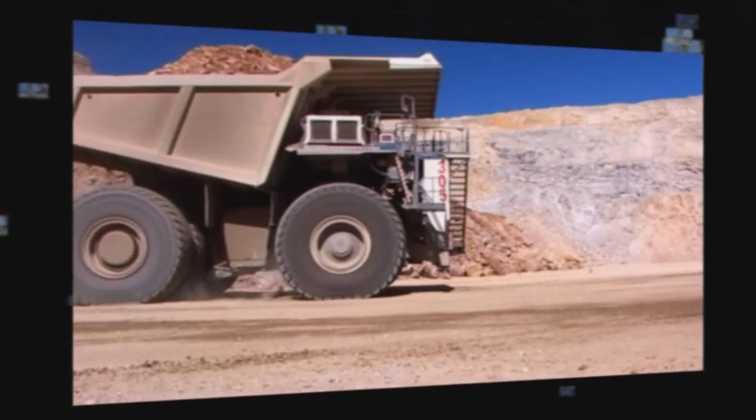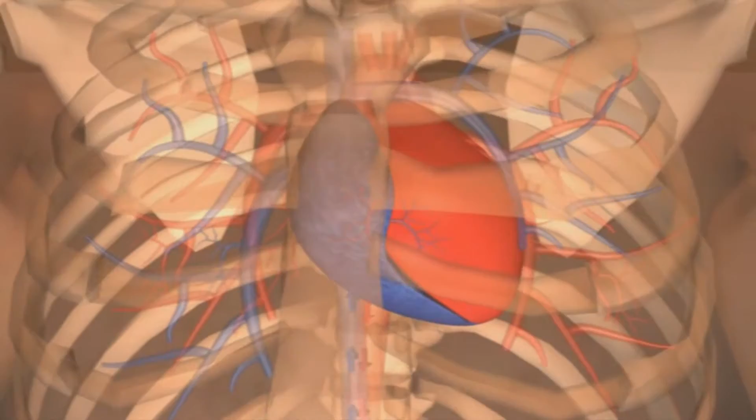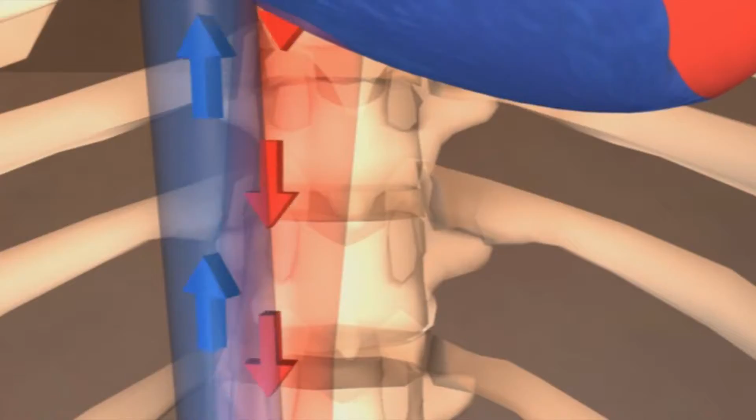It should come as no surprise that the key elements in today's powerful hydraulic systems bear so much similarity to the remarkable technology within the human body. The hydraulic pump is much like the heart. The tubes, flexible hose, and couplings are like the blood vessels of the circulatory system.

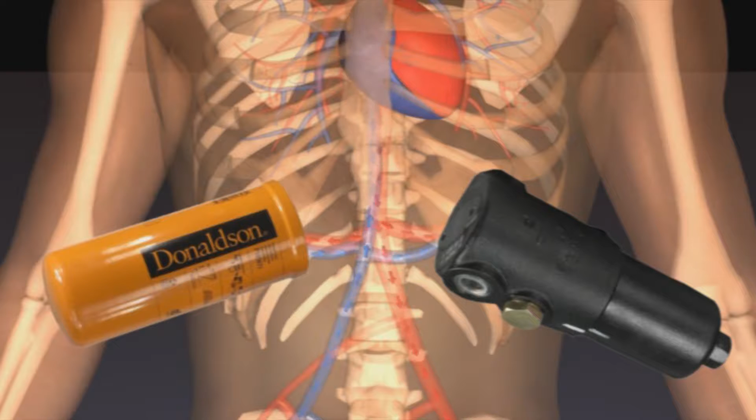And the hydraulic fluid is like blood, which is filtered by the life-sustaining kidneys. Our interest is primarily in filtration technology, which in the hydraulic circuit removes a whole spectrum of impurities like the kidneys do. Unlike the human hydraulic system, which under normal circumstances is self-sustaining, man-made hydraulics needs careful servicing and maintenance.

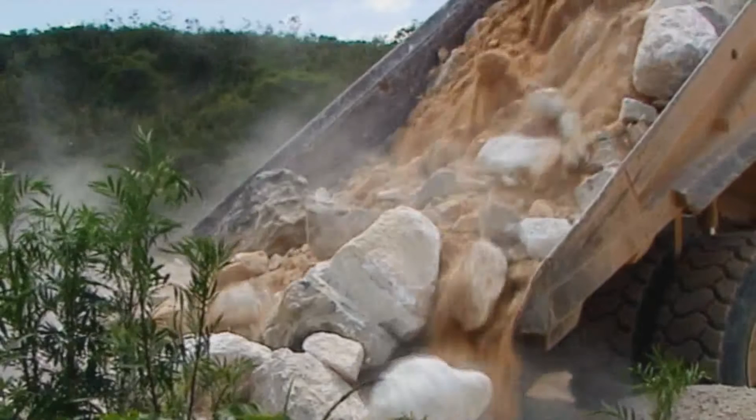70 to 80% of hydraulic component failures are attributable to contaminant in the oil. Because hydraulic power is often the prime force in big projects, downtime of stationary and mobile equipment can result in large losses and unexpected expense.

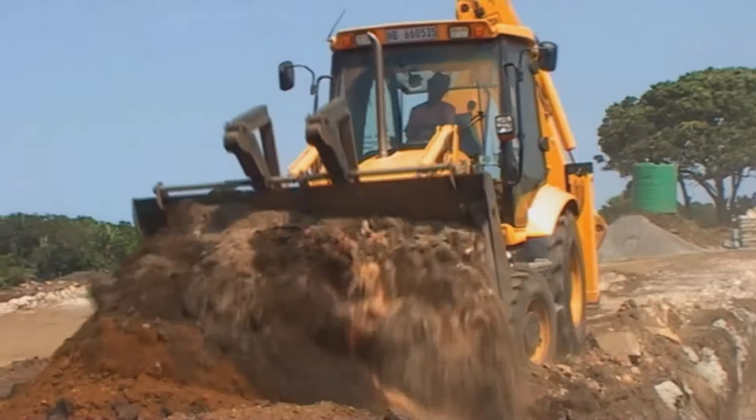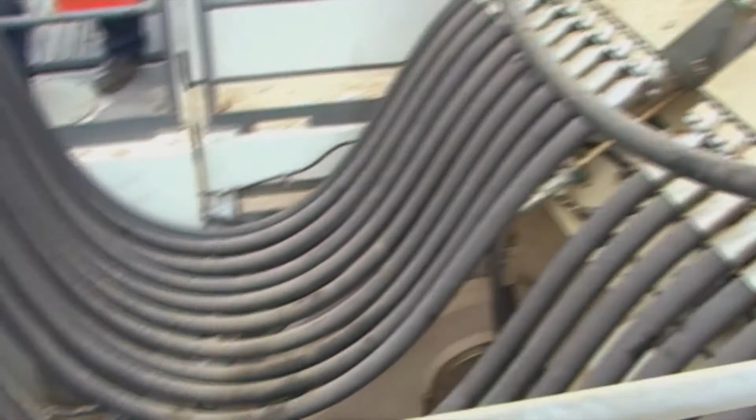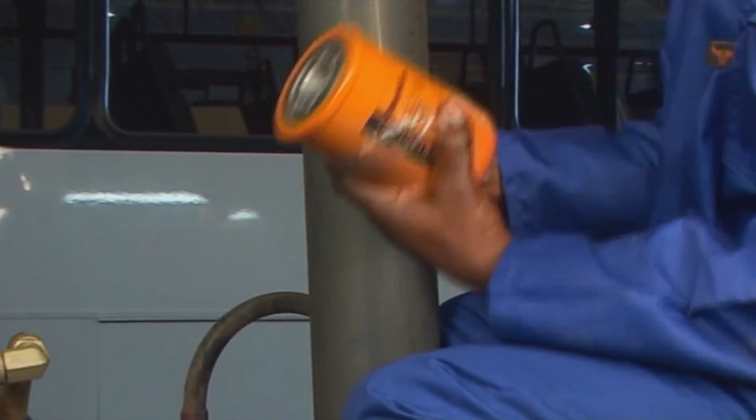Besides its destructive effects on the system components, contamination of the oil has other multiple negative consequences. The hydraulic system loses some of its energy and lubricating capacity, as well as its ability to transfer heat, and leakages are produced. This Donaldson training module will provide guidance in proper filter application and contamination control.

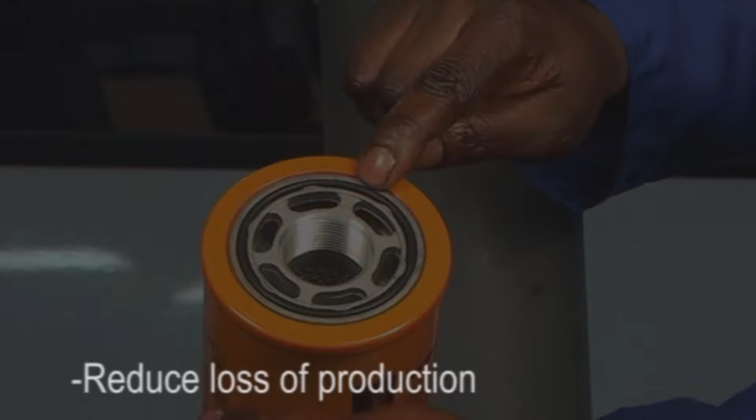We know that through clean oil, Donaldson filtration technology will help you reduce loss of production and maintenance expense. The right filtration solutions will lower your cost of hydraulic equipment ownership by reducing component repair and replacement and by

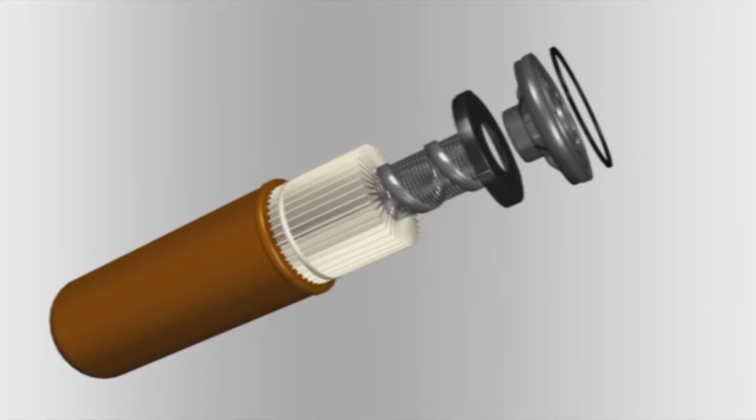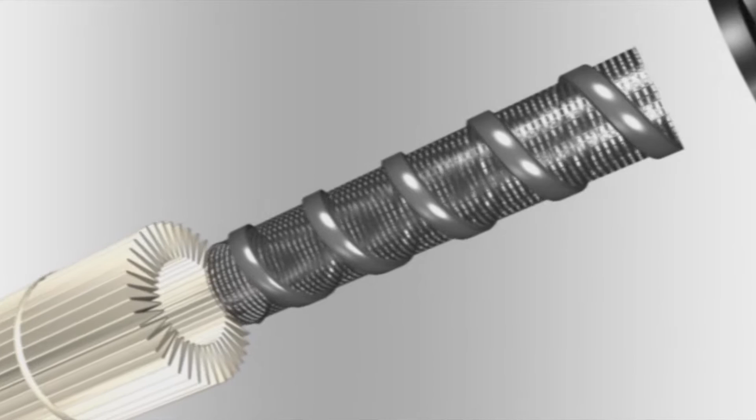Here are just a few design highlights of the Donaldson spin-on liquid filter, which is made for durability and consistent quality. The Donaldson louvered center tube and spiral lock seam allow more flow area. There is also greater collapse strength, and the smooth surface eliminates wear on the filter pleats.

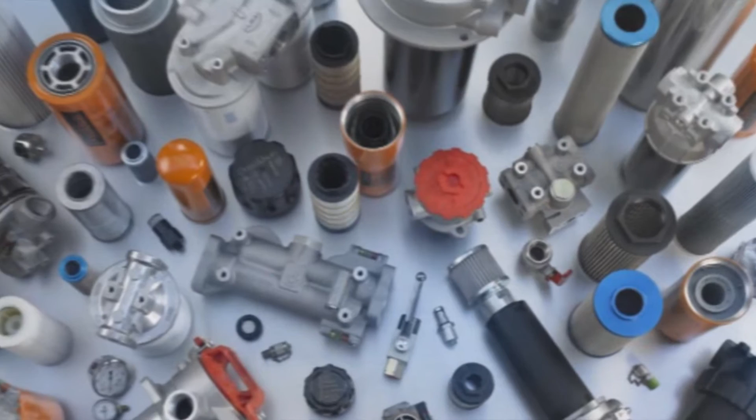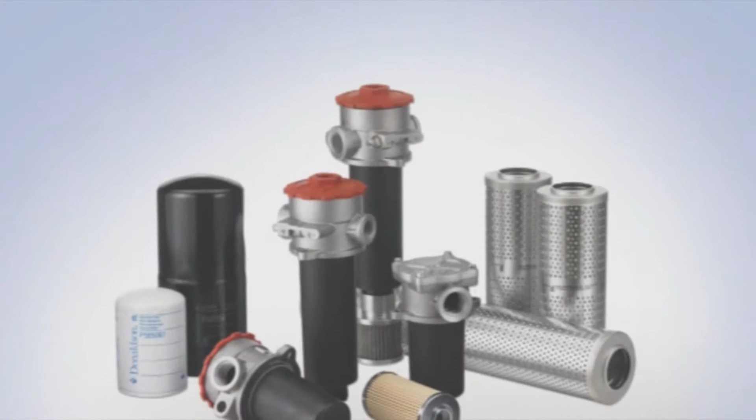Donaldson has developed and continues to innovate a full line of mobile hydraulic filters for the protection of machinery and components in hundreds of heavy-duty mobile equipment and industrial applications. The Donaldson product lineup includes quality hydraulic filter assemblies, filter heads, replacement spin-on filters and filter cartridges, test points, and reservoir accessories.

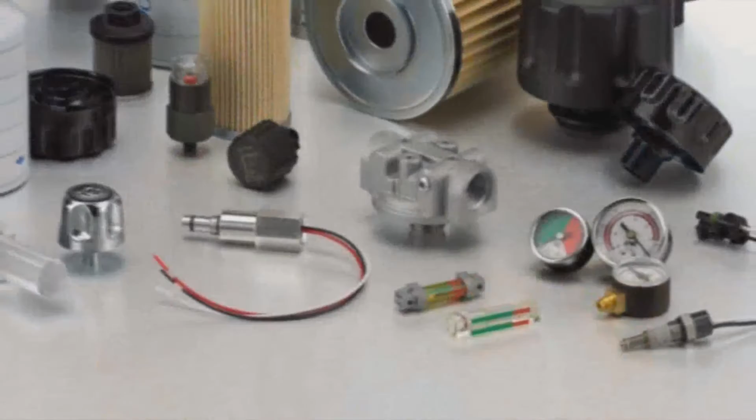Let's look into the hydraulic oil holding tank. It's here that most of the contaminant finds its way into the oil.

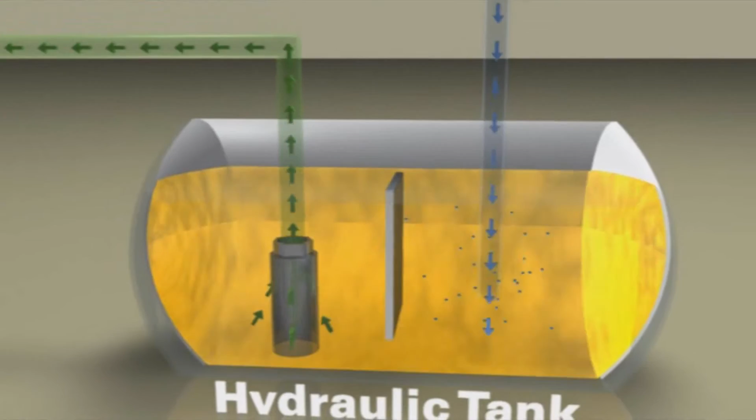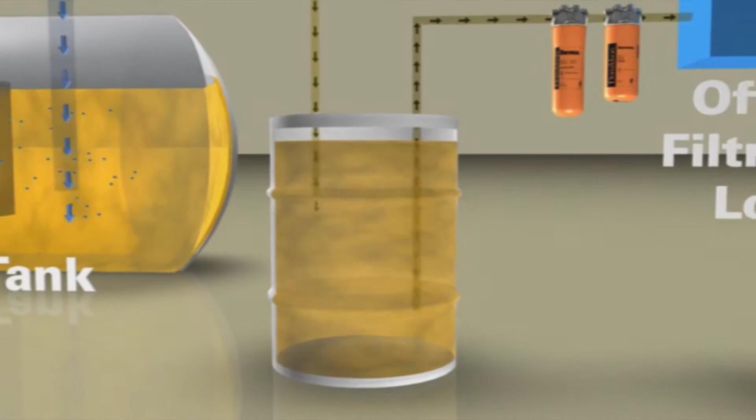First, it's important to note that new hydraulic oil is not pure. At an approximate ISO cleanliness level of 22-21-18, it is significantly higher, that is, less clean, than OEM standards. This has prompted a leading global heavy equipment manufacturer to recommend filtering new oil before pouring it into the hydraulic tank.

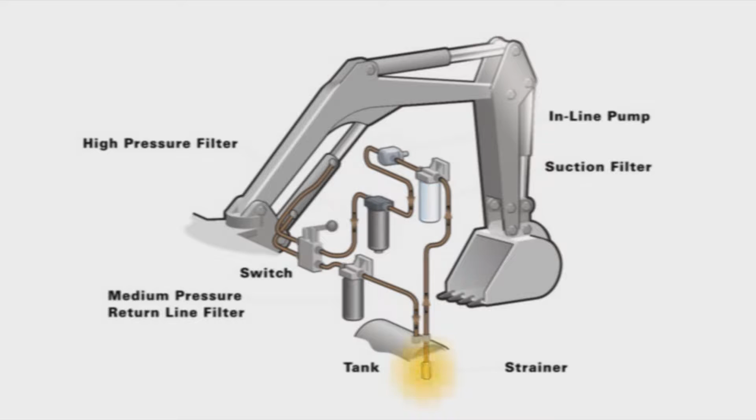Looking at this animated hydraulic circuit, note how the oil is drawn through a strainer in the tank, which removes larger debris. The oil then goes onward into the low-pressure pump-protecting suction filter. Low-pressure filters are the most commonly used type in a hydraulic circuit.

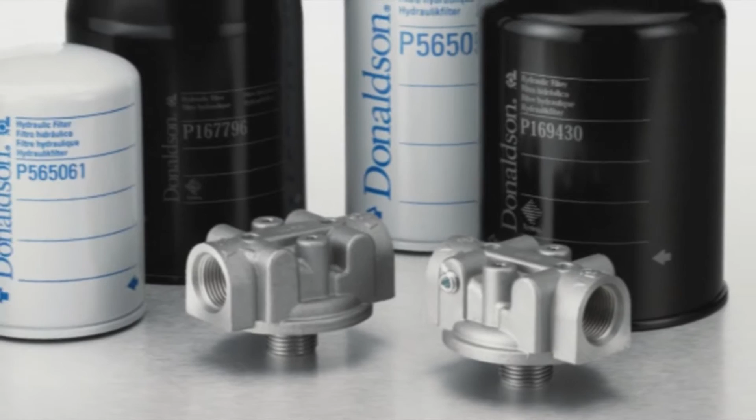Donaldson has a broad product line of low-pressure spin-on, cartridge-style, and in-tank filters for solving filtration challenges in virtually any application. From here, the oil, which has been filtered of

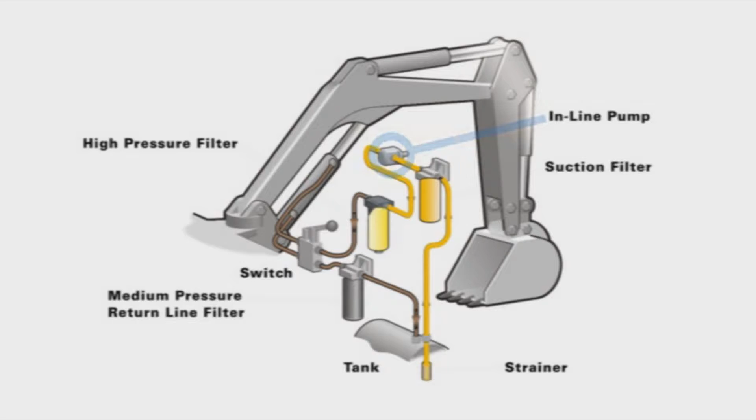potentially damaging particulate matter, goes through the inline pump. It is then filtered again in the high-pressure section of the circuit. This second filtration is to protect the expensive hydraulic components, the muscles of the system, from particulate and debris.

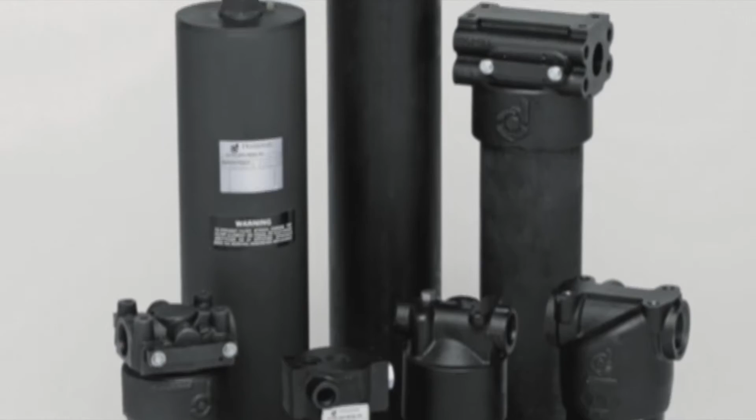All of our high-pressure filters contain Donaldson Synteq synthetic filter media, specially developed by Donaldson for high-efficiency liquid filtration. After doing its work, the hydraulic oil proceeds back to the holding tank. It first passes through the medium-pressure return line filter, which removes contaminants generated during component activity.

Ideal for medium-pressure application in the circuit is the Donaldson Duramax series. Duramax is well known as the highest-rated spin-on style filter available and is most often used in return line positions.

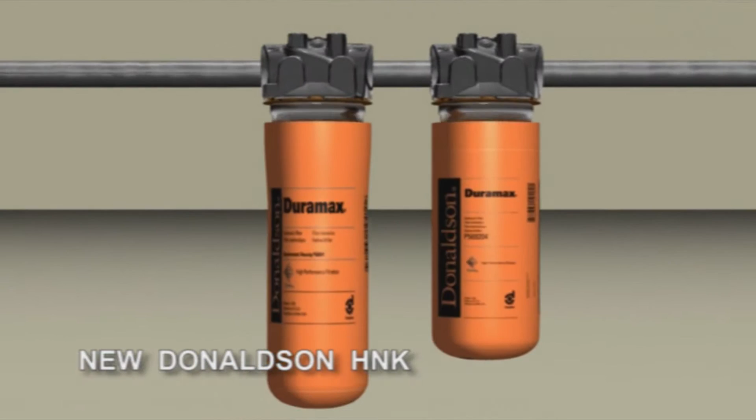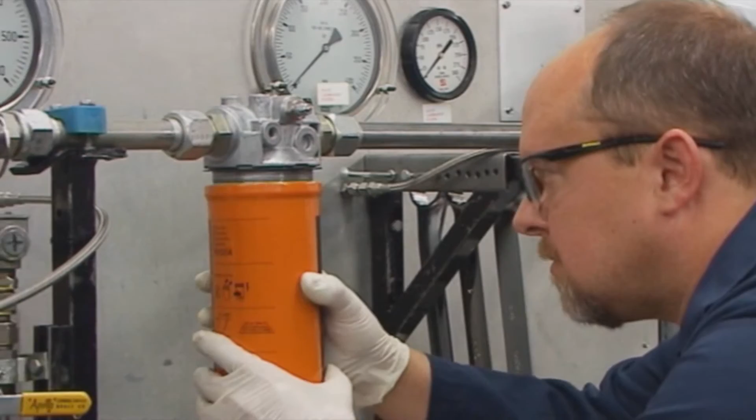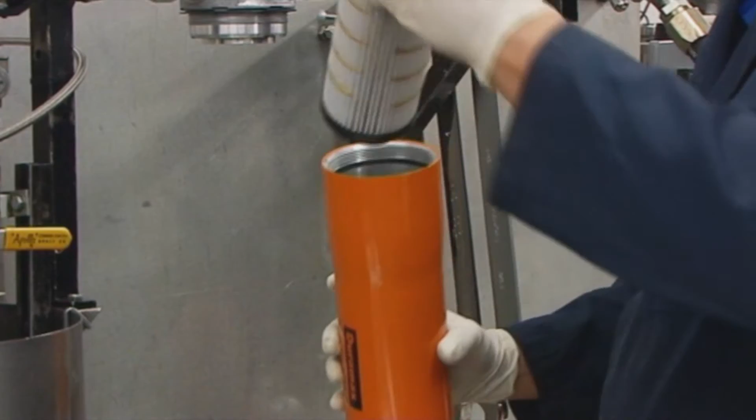This new Duramax filter allows you to choose between a spin-on or bowl cartridge style filter without changing heads. The new filter interface makes service easier and provides reliable sealing without having to torque to specification. Its improved performance is a necessity in some applications for meeting ever-increasing system cleanliness requirements.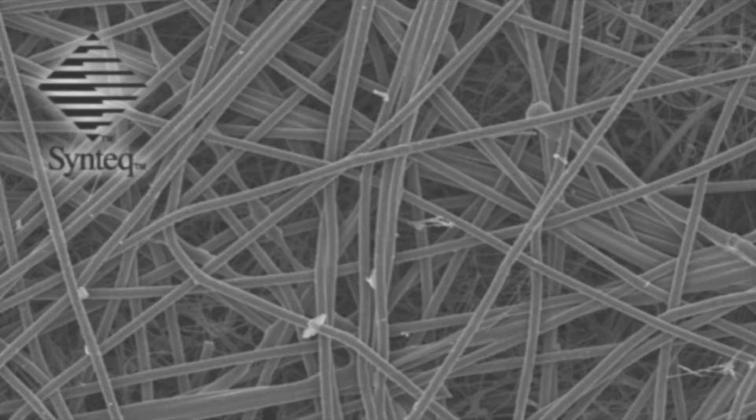Although cellulose media will suit some applications, others may require Synteq synthetic media in medium-pressure applications. For the same media area, the Synteq media gives a lower pressure drop than the cellulose media due to thinner fibers.

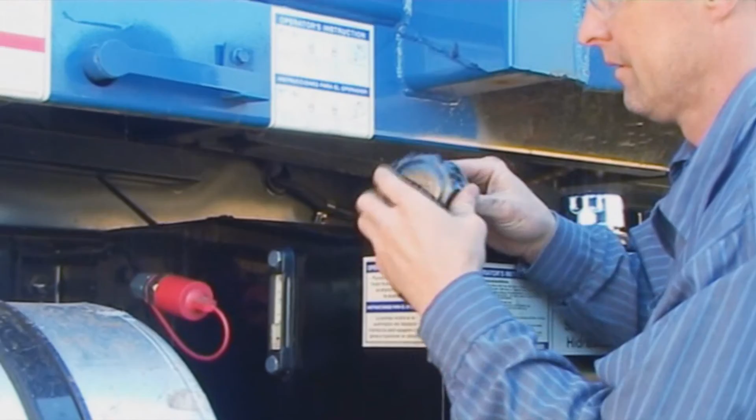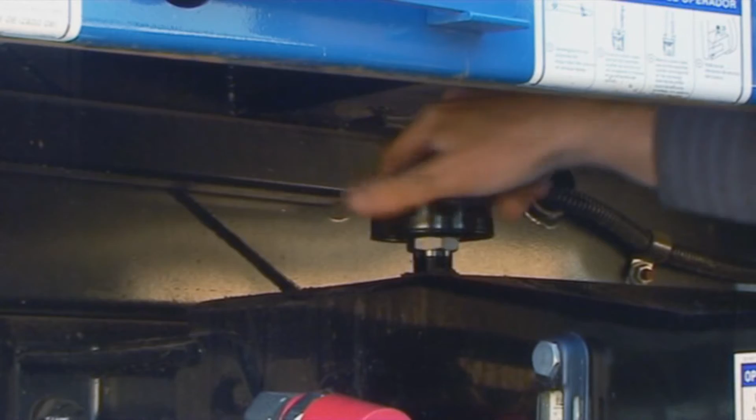Donaldson's highly effective series of breathers is a first line of defense against moisture and particulate in the air. It includes thermally reactive advanced protection, or TRAP breather technology. This is an entirely new technology that begins working faster and provides better moisture protection for hydraulic and lube oil reservoirs.

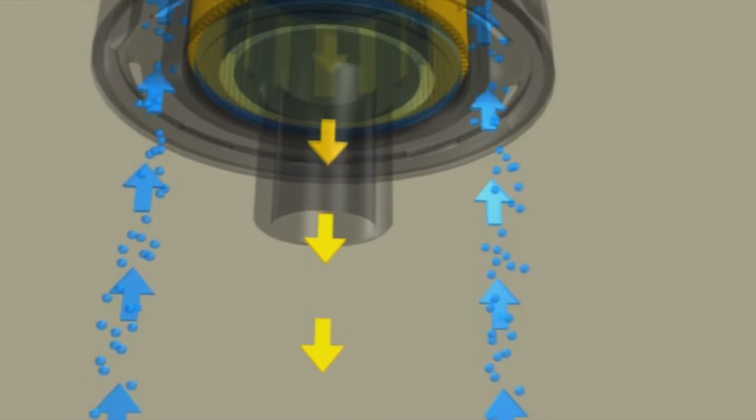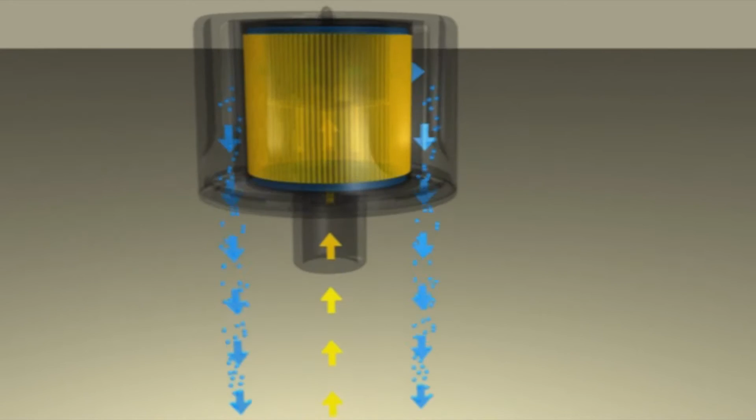This technology allows only dry air to enter the reservoir as the system breathes in. When the tank exhales during the normal day-night temperature cycle, this exclusive, innovative Donaldson breather technology continuously regenerates breather water holding capacity. This is in contrast to desiccant breathers that require frequent change-out.

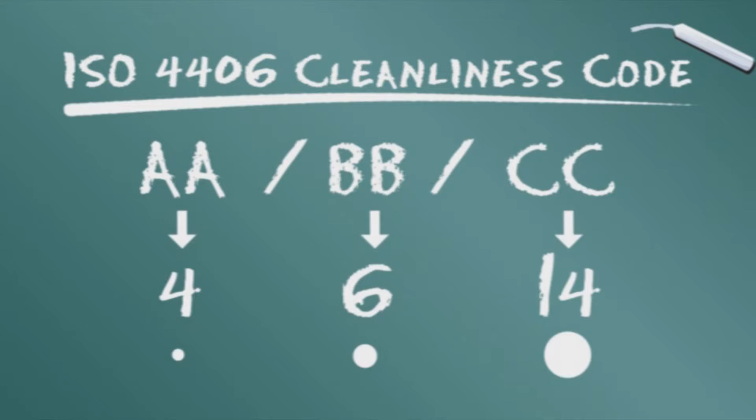A brief word about the ISO Cleanliness Code, which is important in determining the condition of hydraulic oil. The ISO 4406 Cleanliness Code uses 3 separate numbers to describe the cleanliness of an oil sample. Measurement is taken of particulate sizes at 4 microns and greater, 6 microns and greater, and 14 microns and greater. The resulting figure, say 18, 16, 13, is the ISO Cleanliness Code level.

Suggested ISO 4406 code cleanliness levels have been published. On the stringent side, for example, a 15, 13, 10 code level may be specified for servo valves with very close tolerances. A less demanding 26, 24, 20 would be suitable for low-pressure systems with large clearances.

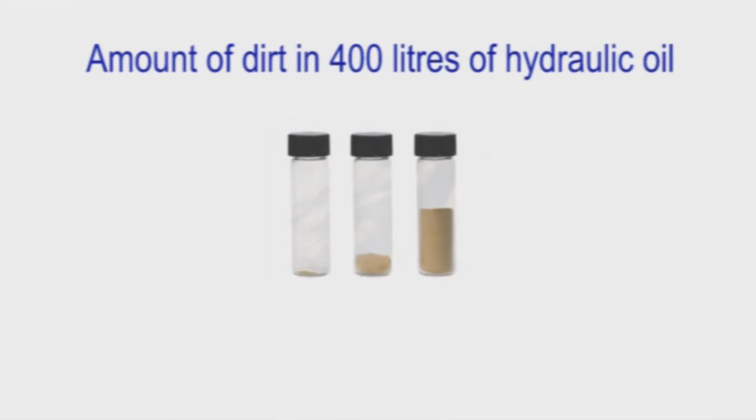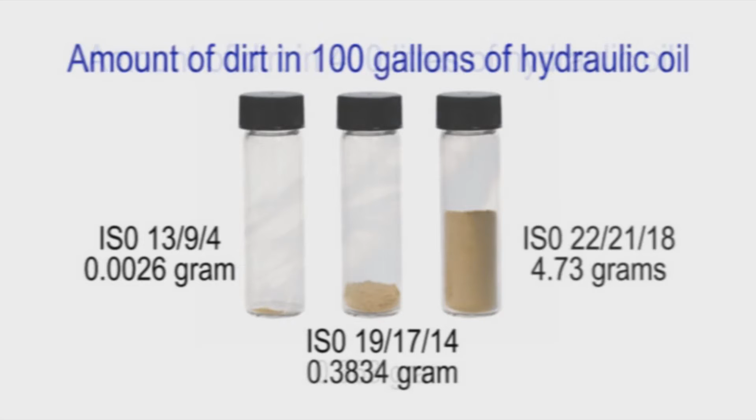Looked at another way, the dirt in these 3 glass containers each represents a different ISO 4406 cleanliness level, from a tiny fraction of a gram on the left to about 1/3 of a gram in the middle to almost 5 grams of dirt on the right. Note how the 3 cleanliness code numbers also get progressively higher to indicate more dirt and less oil purity.

Most component manufacturers specify filtration level recommendations using the ISO code. This code will help you select the filters with the right Donaldson media to meet manufacturer specifications.

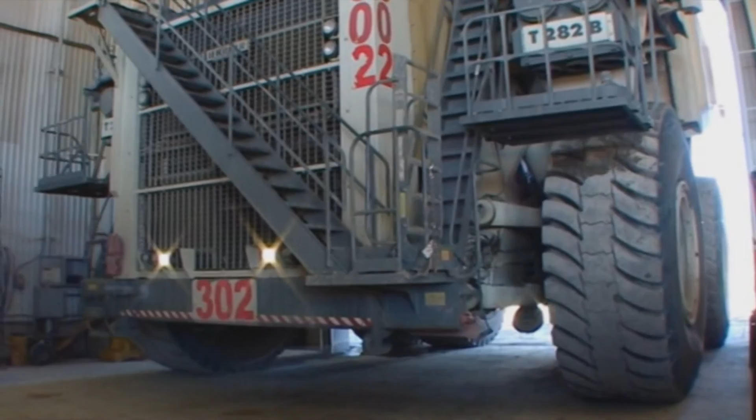There's more to know, however, about contaminants which destroy hydraulic components and bring some of the world's largest vehicles and machinery to a halt. Contaminants in the hydraulic system include solid particles such as sand, silt, and metal, solvents, water, air in several forms, and soot.

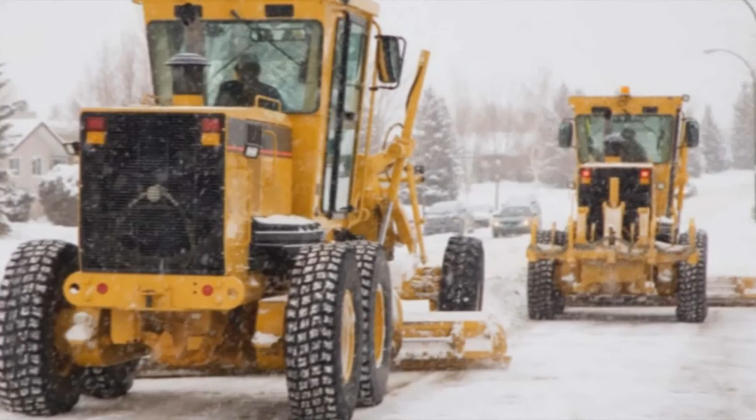Water in your hydraulic system means trouble. Water is more compressible than oil and has no sealing or lubricating ability and will negatively affect the performance of the hydraulic system.

Other contaminants, such as sand, enter the system in various places, such as worn wiper seals. Inadequate breather efficiency also allows dirt to ingress the holding tank.

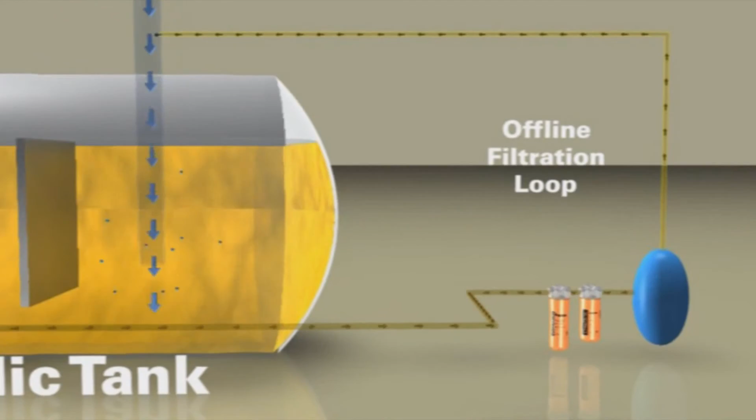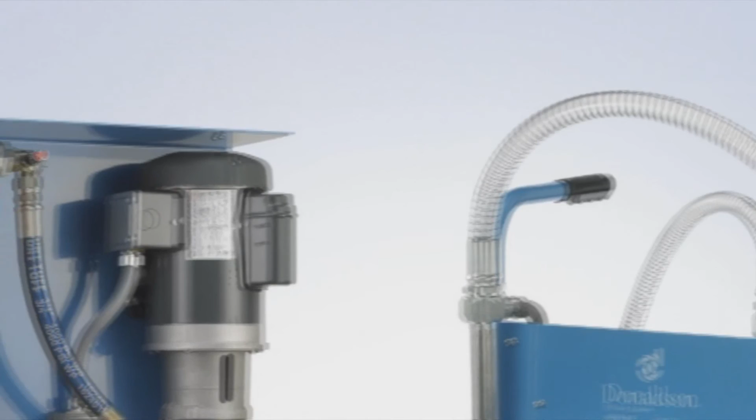There are situations where offline filtration can be used to supplement existing filtration to achieve target ISO cleanliness levels. For these offline applications, choose from systems such as the Donaldson Turnkey Filter Panel or Portable Filter Cart and Filter Buddy.

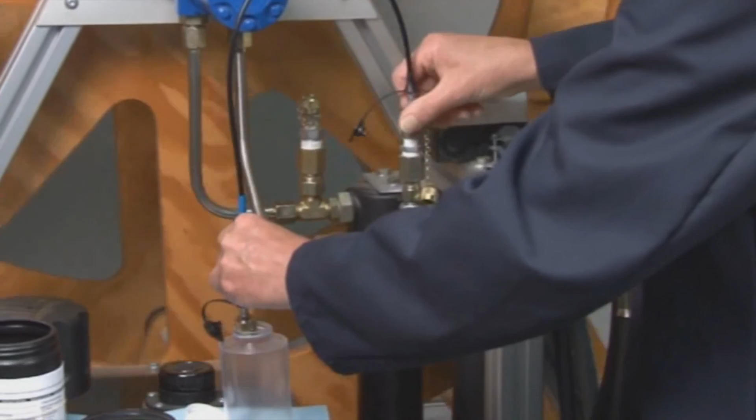Analysis of your hydraulic oil is another important part of protecting and maximizing the life of hydraulic systems. Hydraulic oil from equipment in regular use should be sampled at 500 hours or monthly.

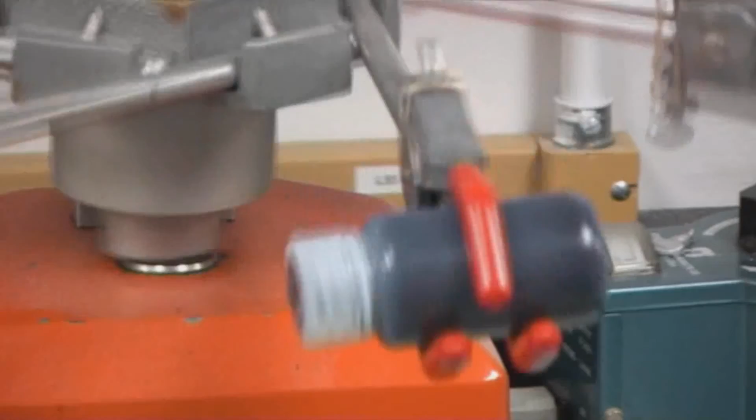The Donaldson Hydraulic Oil Analysis Service, which is described in Module L6, includes an evaluating of the test results and specific recommendations and warnings of imminent component damage where warranted. You can also learn how to extend your hydraulic oil drain intervals.

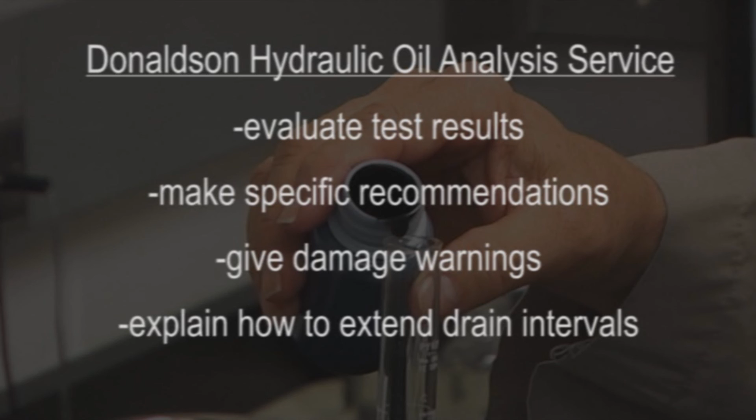This servicing information is provided as a best practices guide. It is not, however, intended to replace or supersede the service instructions supplied by your engine or vehicle manufacturer.